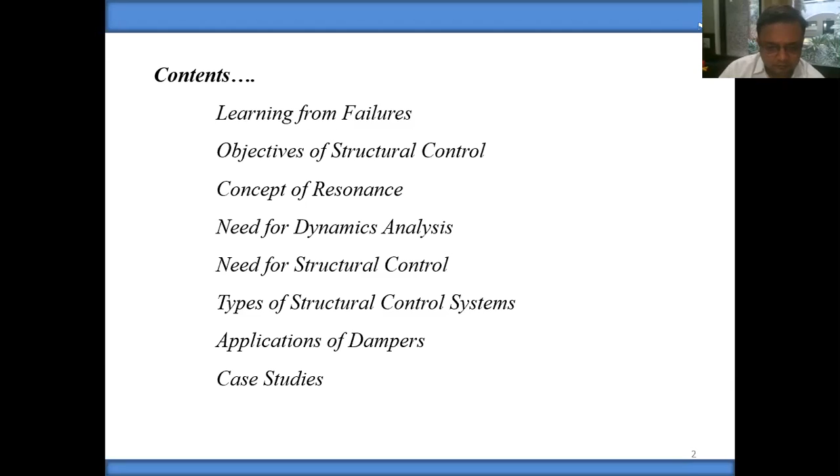So mainly we will include these few contents in context to our topic. First of all, we will see some photographs which I normally show to the audience just to get the feel of the content, and it creates basically the need for the study. Then we'll see the objectives of structural control, a little concept of resonance, need for dynamic analysis, need for structural control. Then we'll briefly see the types of structural control systems, and we'll see the application of dampers and a few case studies. So just a few slides I will show you.

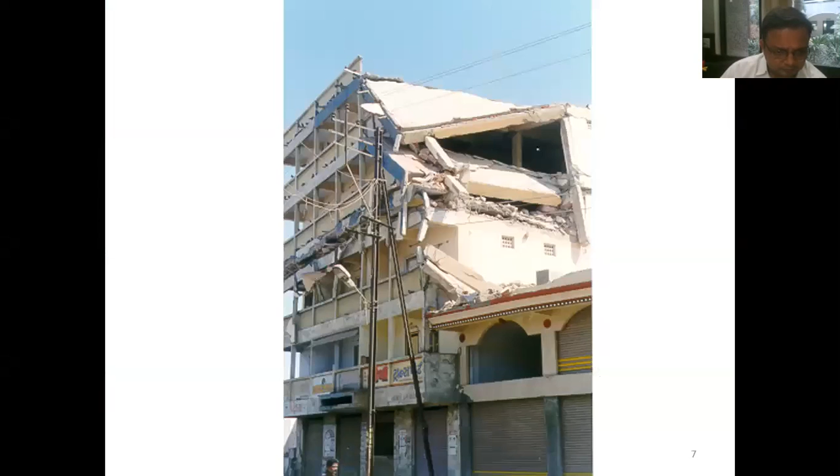Just the photographs from our unfortunate event of the 2001 Bhuj earthquake. So I'm scrolling through all the photographs, around 10 or 12. This will just give you the highlight - of course you must have seen all these photographs from many previous speakers or in your study also. This is just creating interest in the subject, in the sense that it emphasizes the importance of earthquake engineering in society.

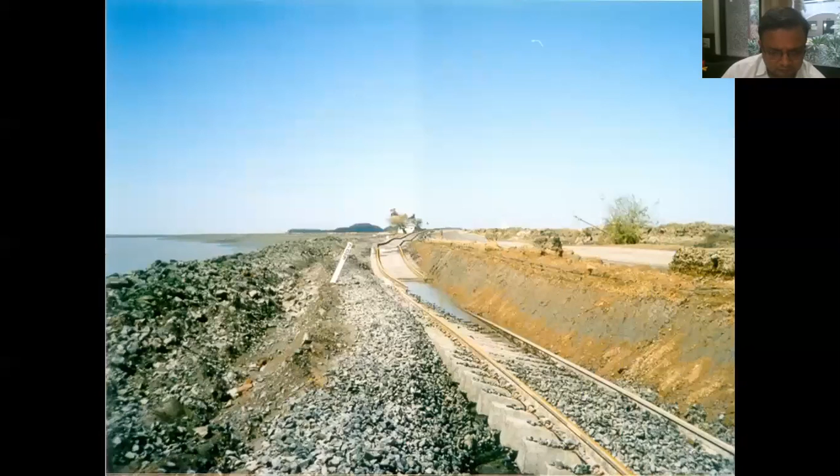That you just see the photographs - failure, collapse. So we can imagine what earthquake can do if the structures are not properly designed and constructed. See, people are spending their whole life to earn the money and to build one house, and what earthquake can do just in a few minutes.

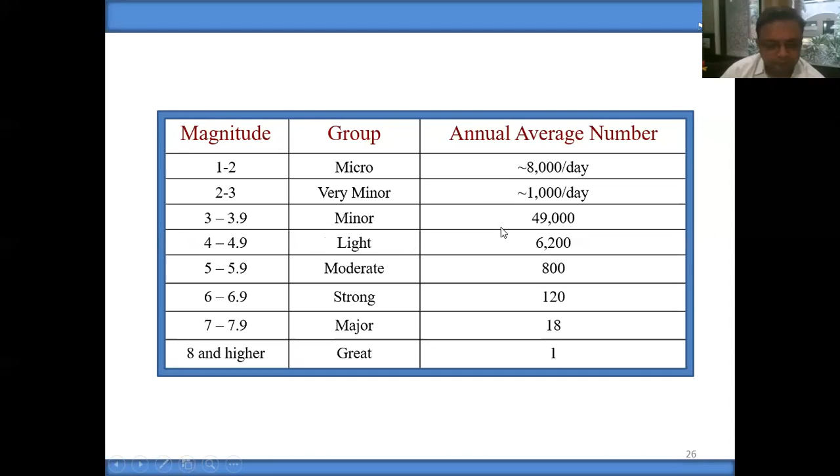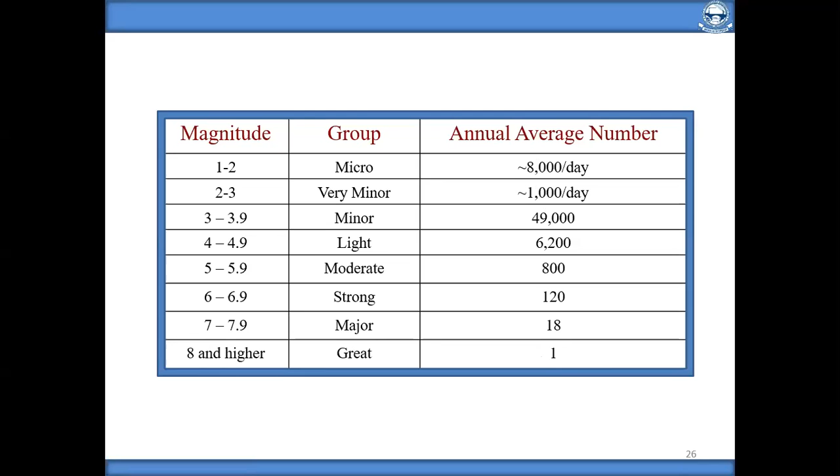If you consider a year, once in a year one earthquake comes which is of magnitude 8 or greater. So you can see a continuous 365 days disturbance due to earthquakes. And if we do not care about proper design, detailing, workmanship, material quality - everything, all planning, execution, configuration - if any of the components are missing, then it will lead to catastrophic disaster which we have seen in the earlier photographs.

Now two words are there - analysis and design, very basic words - which can be defined by means of these three parameters: force, system, and response. It means if we know the force, if we know the system, and we want to calculate the response, that procedure is called analysis. And on the other side, if we know the force, if we know the response - means let's say response means we want to have some zero deflection, if we consider a beam - so if we know the response, based on that force, to obtain that response, what should be the system design.

Now here, when we talk about earthquake engineering, this analysis word becomes seismic analysis, and design becomes seismic design. For the analysis, we mainly have IS 1893, which deals with earthquake forces and how to estimate the earthquake forces basically - so it covers the seismic analysis part. The seismic design, if we talk about it, is basically the ductile designing, as per IS 13920.

Seismic design philosophy must have been covered by the earlier speaker, but this is a very basic thing. As you're all attending this earthquake engineering STTP/FDP, you must have background in earthquake engineering, and you must have seen that as per IS 1893, we are not designing earthquake-proof structures, but mainly considering the earthquake resistant philosophy, that is the seismic design philosophy.

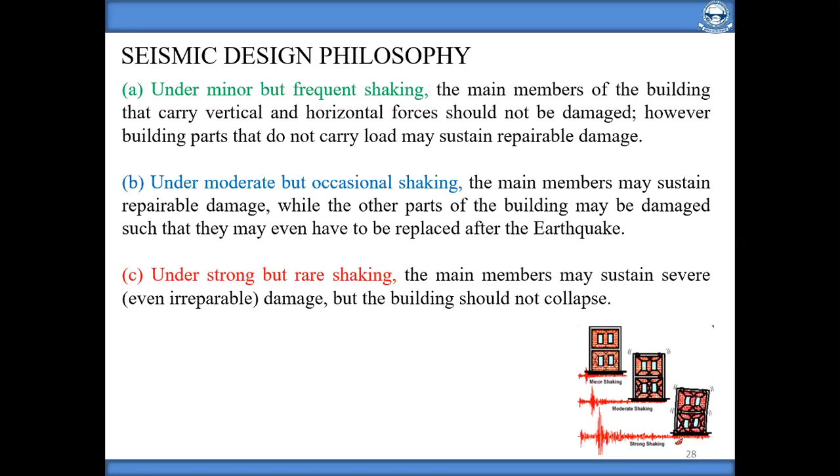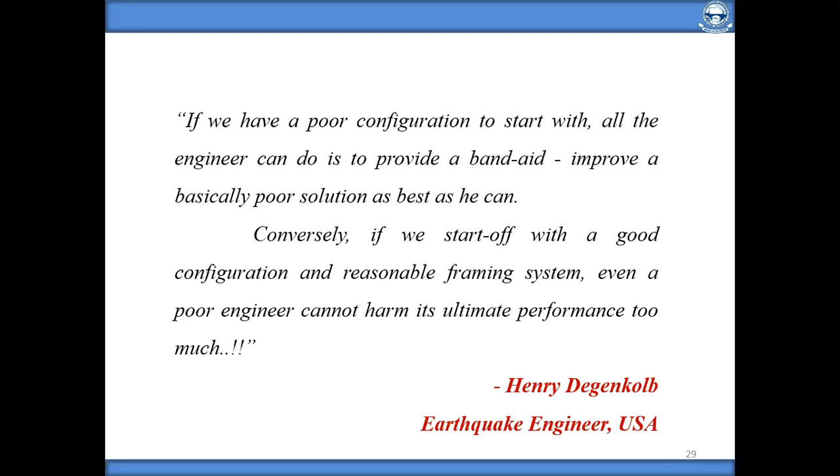Configuration is equally important as stiffness and ductility. There is a famous quote by Henry Degenkolb, a famous earthquake engineer of USA. He said, if we have a poor configuration to start with, all the engineer can do is provide a band-aid, improving the poor solution as best as he can. On the other side, if we start with a good configuration and a reasonable framing system, even a poor engineer cannot harm its ultimate performance too much. This emphasizes how much importance configuration has.

Again, the four points to consider: proper planning, proper structural design, good construction, and regular maintenance.

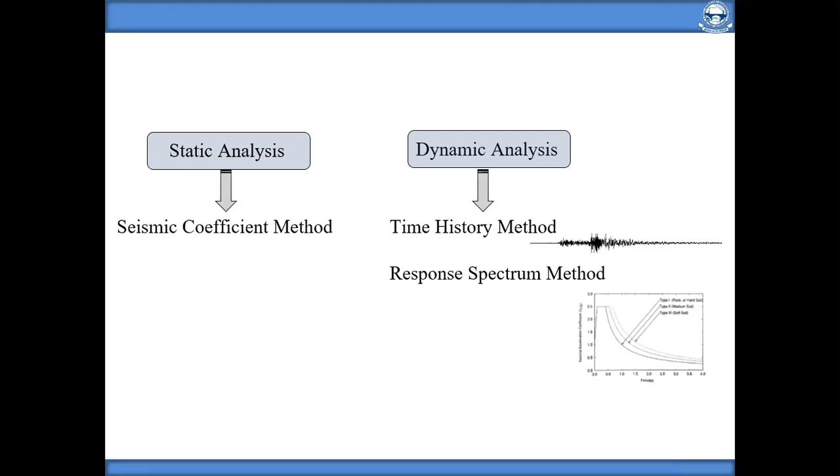Whenever dealing with the structural control system, the main analysis we have to do is dynamic analysis. What is the need for dynamic analysis? As per IS 1893 code, there are mainly two types of analysis: static analysis and dynamic analysis. In static analysis, that's the seismic coefficient method as per code. Dynamic analysis consists of two methods: time history method and response spectrum method. These are the broad analysis types; I haven't included details about linear and non-linear analysis since both categories have linear and non-linear analysis, but that's been covered by previous speakers.

Now, what is the need for dynamic analysis? Let's say we have a structure. We calculate the base shear as per the code equation VB, which you must be aware of, and we calculate the design horizontal seismic coefficient AH, which consists of mainly four parameters: Z, I, R, and SA by G. SA by G is based on the time period.

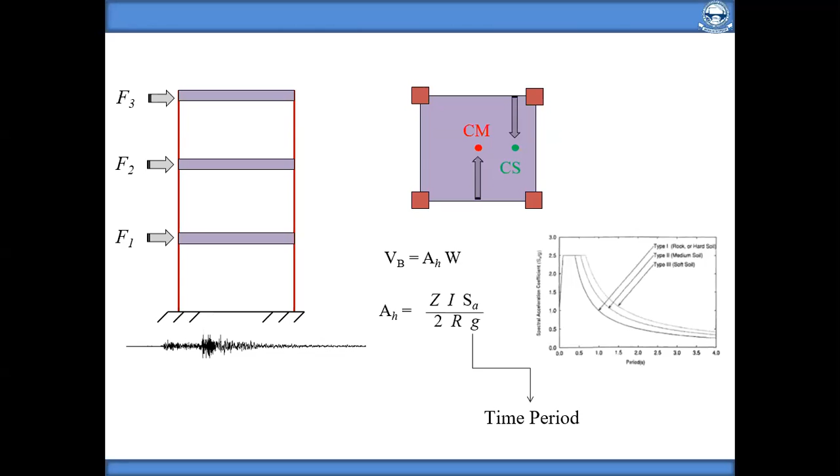If we consider the static analysis, here's a sample equation. Many equations exist for different types of buildings, with shear wall, without shear wall, etc. But to give you the basic idea, one conventional equation most commonly used is 0.09h by root d. Now, let's say we have this structure of G plus 2 story, with M1, M2, M3 as three masses and three stiffnesses.

This building elevation has two different cases. In case one, all columns are 300 by 300. In case two, all columns are 600 by 600. Height is same, plan dimension is same. So if the height and plan dimensions of the building are same, then the time period which we are calculating will be same for both buildings.

But if you imagine this as a model structure and we put these two buildings on a shake table, obviously there will be different behavior, because the stiffness is different, column sizes are different. But that behavior will not be captured by this time period, which is based on our empirical formula, that is the static seismic coefficient method.

Hence there is a need to perform dynamic analysis to actually capture the real behavior of the structure based on its stiffness and mass proportionality. And hence we go for dynamic analysis, calculating the time period using the conventional equation 2 pi by omega n, where omega n, the natural frequency, is based on square root of k upon m. This is just the basic equation, not our topic for today.

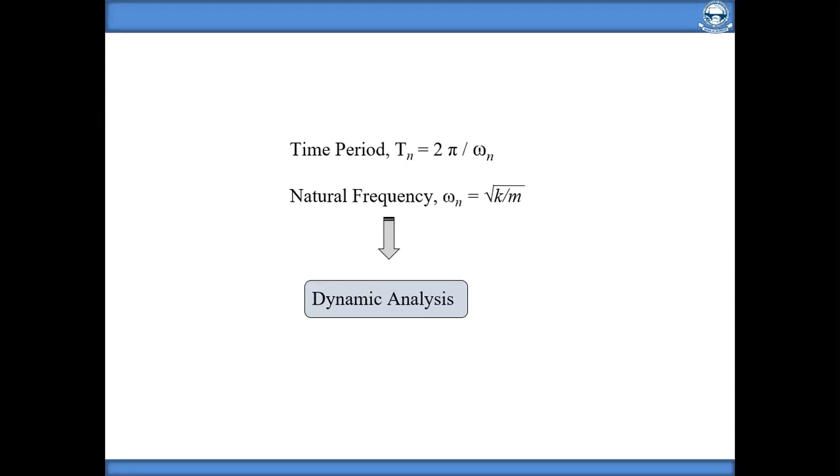I am emphasizing the need for dynamic time history analysis, which we need for structural control also. This is the equation to calculate the natural frequency, basically for the single degree of freedom system. If it is a multi degree of freedom system, then we have to perform modal analysis, eigen analysis, etc.

Now let us go to the seismic vibration control of this structure, that is called the structural control system.

The main objective of civil engineering, as we know, is mainly to design and construct safe and stable structures which can resist static as well as dynamic loading. Static meaning conventionally, gravity load, dead load, live load. Dynamic loading includes wind and earthquake, which are our conventional dynamic loadings.

Now, this objective of civil engineering structures can be achieved by the traditional approach which we are currently using, that is designing the structure with reference to strength as well as ductility aspect. But sometimes it may not guarantee the safety of the building against dynamic loading, which is very random, very irregular in nature, and highly uncertain.

Sometimes what happens, if we have a tall structure, let's say a 100-story building, and in comparison, imagine a 3-story building. To control the displacement of the 3-story building, what should be the column size? Randomly, let us say 450 by 450 mm. Typically our flats or apartments have 450 by 450 columns for a 3-story building.

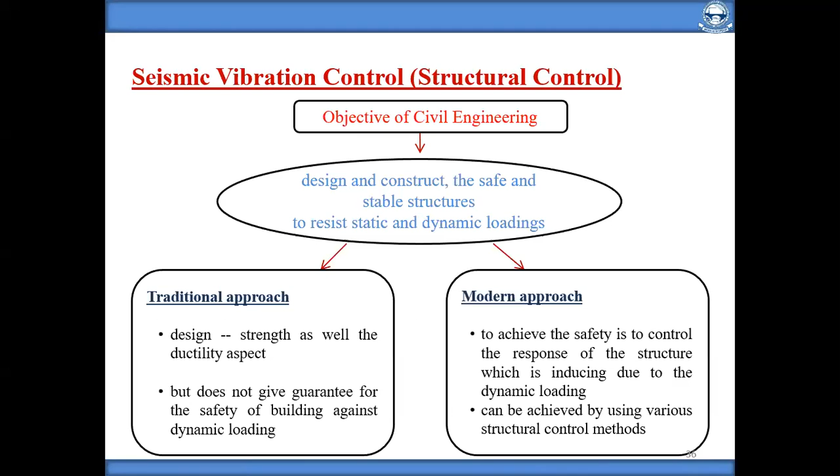Based on this particular need, there are a few objectives for the structural control system. The main objectives are to secure life safety, that is obviously number one, our main need, and to upgrade the comfortability for the user.

Let us go back to that previous example, the 100-story structure. During the wind, if there is a 1 centimeter displacement in the 100th story, what will be the comfort level of that user? It will not be functional actually. So comfortability of the users is equally important in comparison to maintaining the building function.

To maintain the building function, obviously during the earthquake, whenever there is some collapse, failure or damage, then the building should immediately be in a functional mode.

To secure the safety of non-structural elements, let us say we have some very important structures like a hospital or a nuclear power plant. For these type of structures, non-structural elements are equally important. Let's say if we have a 3-story hospital, and at the 3rd story there is an operation theater having some very costly equipment, or a nuclear power plant where pipelines are going on - making sure the safety of the non-structural component is also equally important. That is also the main objective of structural control, in addition to protecting the structural element.

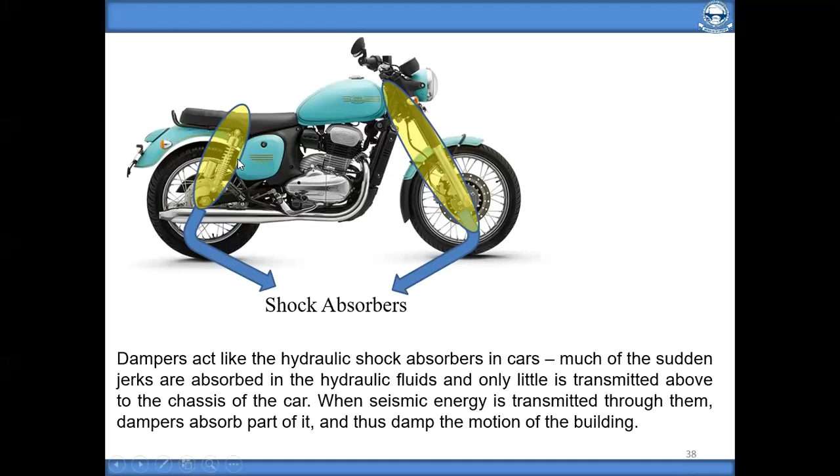So the dampers, the control which we are going to use, it is just like the shock absorber which we have in our vehicles. In a vehicle, in the front wheel there is a piston and cylinder, in the rear wheel there is a piston and cylinder surrounded by a spring. They are called shock absorbers in the automobile industry. In structural or civil engineering, we basically call it a damper - exactly the same mechanism, exactly the same configuration.

We are putting the damper - let us say this is the structure, and the damper we are putting like this, inclined. This is just a broad figure.

So the dampers are just like a shock absorber which we have in our vehicle, and it can absorb the jerk. Just imagine you are riding a bike without this shock absorber - if there is some unevenness in the road, immediately it will be affected at the seat level in terms of jerk. Just imagine the comfort level you would have without the shock absorber.

Now if you put the shock absorber and imagine riding this vehicle on some rough or uneven road, even those jerks will not be transferred to the seat level, because in between there are shock absorbers which absorb the particular energy. So the seismic energy is transmitted through the absorber, and dampers absorb part of it, thus damping the motion of the building. It reduces the vibration of the structure.

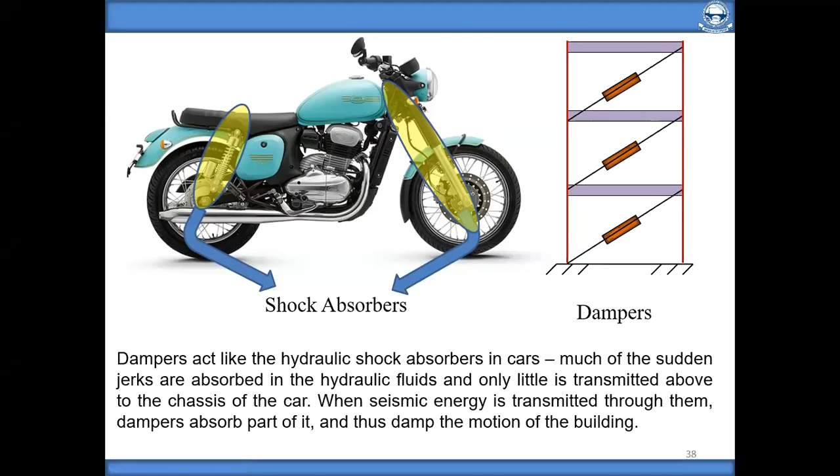Mainly three types of vibration can be controlled by any structural control system. Small vibrations we can control, obviously - micro tremor, traffic vibration, and vibration caused by machines. These can be easily controlled with the help of a structural control system.

Wind vibration, usual wind or strong wind, can also be controlled easily through the structural control system. And of course the seismic vibration, which is of main concern - that is small, medium, or strong earthquake shaking. Whenever shaking comes, the structure should not have severe displacement or severe acceleration, so we can control it.

Just 2-3 slides we'll see the application of the damper, some photographs of real structures, and then we'll go to the type of system, and then again we'll see in detail about this real application.

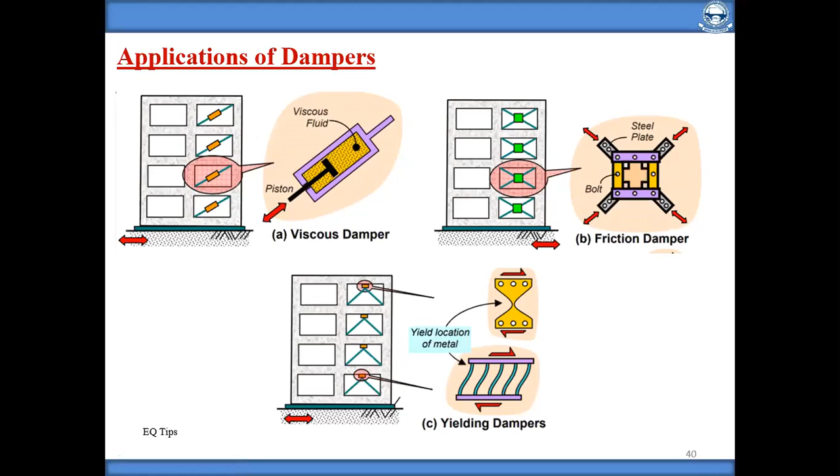These are the ways by which we can provide dampers in the structure to control any of the response - let's say displacement, velocity, acceleration. And ultimately by controlling displacement, velocity, acceleration, we can control the base shear, base torque, etc.

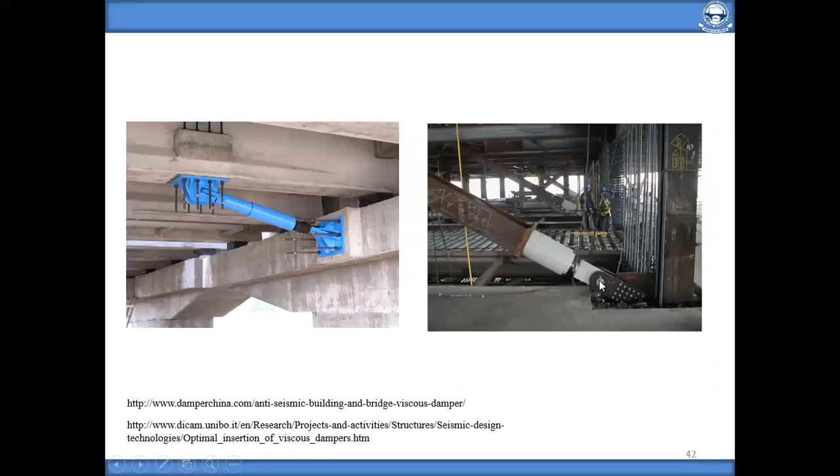Now the main fundamental principles of the structural control system.

The main principle is transferring the vibration energy from the main structure to the auxiliary system. Just imagine our vehicle example. What the shock absorbers will do is transfer the energy, absorbing it based on the jerk due to the unevenness or roughness of the road.

So to transfer the vibration energy from the main system to the auxiliary system, to reduce the flow of input excitation to the main system, between road and seat level there are shock absorbers. The shock absorber will absorb the energy.

To subject the structure to additional damping, whenever we are providing some structural control system like base isolation or primarily a damper, we are increasing the damping to prevent the building from exhibiting resonance.

You must have heard this from school level physics, that resonance is a very dangerous phenomenon. Whenever there is resonance, we have to control it. This can be very easily controlled by means of providing various structural control systems.

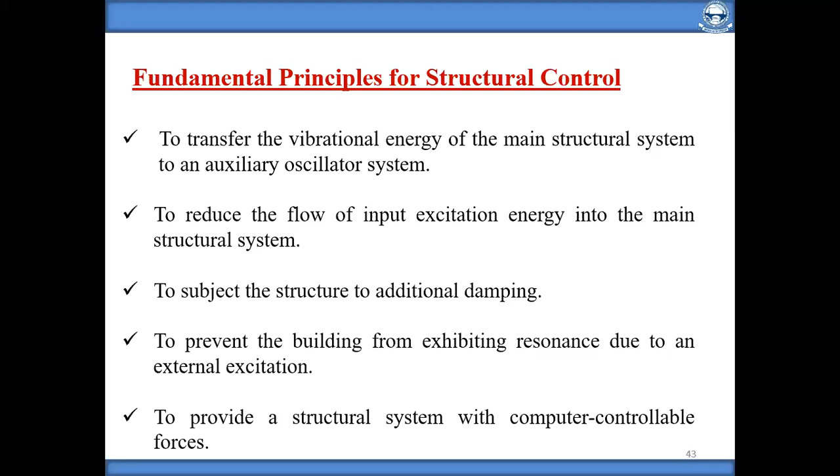And to provide a structural system with computer controllable forces - these are some fundamental principles and requirements for the structural control system. Now what is the required item for the structural control system itself?

Any structural control system should be a fail safe mechanism, meaning it should not do something wrong to the structure.

It needs to be back at the original position. Of course it is needed that the building should be back at the original position when the big wind or earthquake comes or ends. Hysteresis damping mechanism sometimes prevents the building from going back to the original position.

So we have to take care that the structure comes immediately back to the original position. The structural control system should be such that it brings the structure into its original position. It should obviously have good aging property for a number of years, and ideally it should have no or less maintenance.

So these are the required items for the structural control system.

Now, the resonance - you must have seen this equation of motion: mass into acceleration plus damping into velocity plus stiffness into displacement, and on the right hand side we have mass into ground acceleration. This is called the equation of motion.

We have the natural frequency, square root of k upon m, for a single story building, or a single degree of freedom system. If it is excited by the forcing frequency, and when that forcing frequency matches with the natural frequency, resonance occurs.

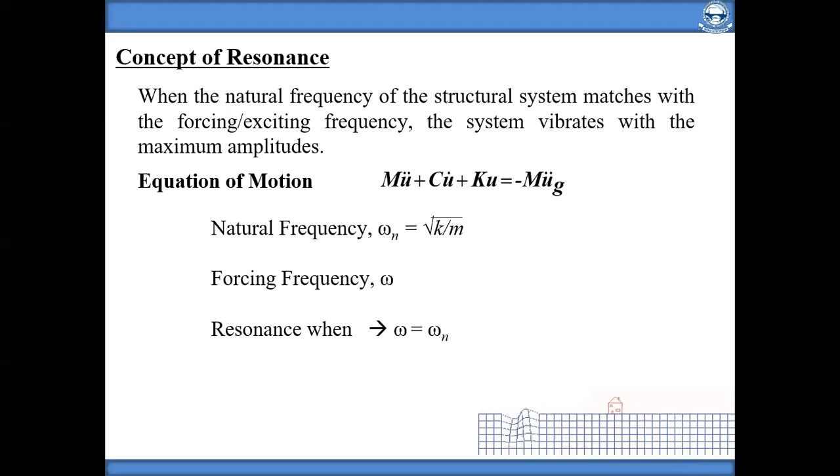So with the help of the structural control system we can avoid resonance also. If we have buildings with natural frequencies omega n1, n2, n3, n4, let's say we have 4 buildings, if the earthquake has frequency omega, then whichever building's frequency matches with this forcing frequency, that building will excite.

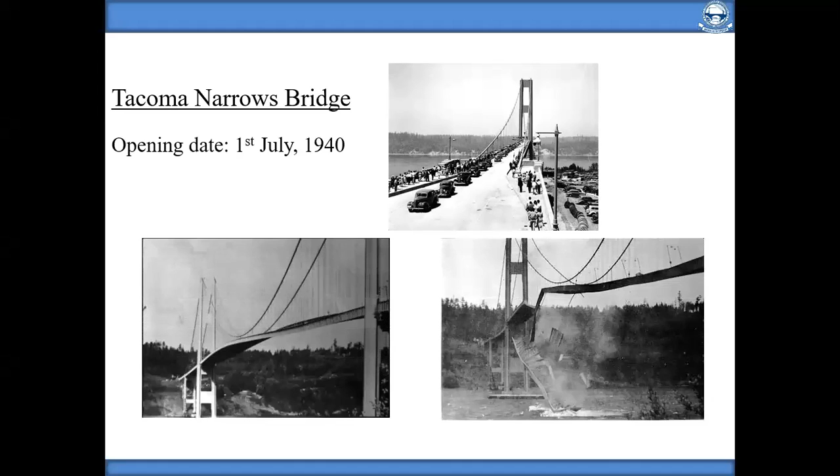There is one famous example of wind induced vibration, wind induced resonance - the Tacoma Narrows Bridge. 1st July 1940 was the opening date, and it collapsed on 7th November, just a few months later. That was because of the wind induced resonance.

This is the newly constructed bridge.

Similarly, one famous example of resonance is the Mexico City earthquake. On 19th September 1985, there was a main shock of magnitude 8.

In 1985, there was a main earthquake. On the next day, there was an aftershock. On the main shock, on 19th September, there was hardly any damage to any structure. But on the next day, even though the magnitude was less, being an aftershock, almost 1100 buildings suffered damage.

400 buildings collapsed and 700 buildings were heavily damaged. Later on they conducted a survey analysis and found that all these 1100 buildings were in the range of 6 to 14 stories, and they had a time period of 2.5 seconds, which matched with the forcing frequency.

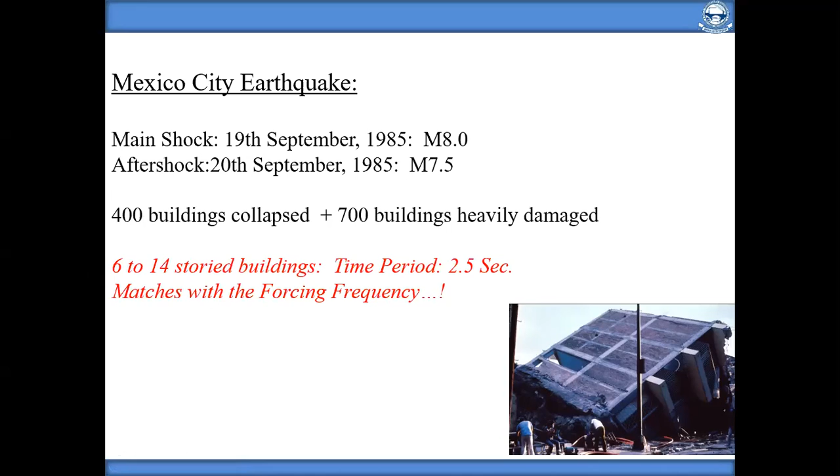So these are the cases of resonance. Now as we have seen, four types of control systems are there primarily: passive control system, active control system, hybrid control system, and semi-active control system, which is the most recent system used worldwide. So one by one we will see all the types of control systems including examples and applications, and then we'll go to the case studies.

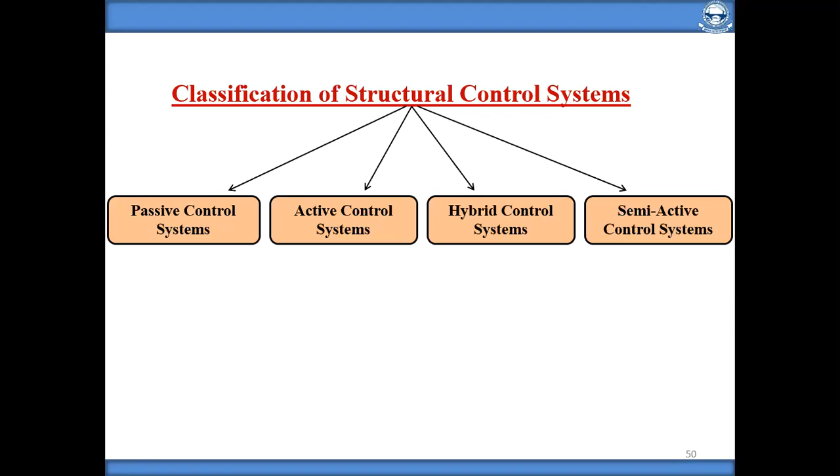As we have seen earlier, this is the equation of motion of the structure without any control mechanism, means without damper or without isolator, base isolation. So the equation of motion will be: mu double dot plus cu dot plus ku is equal to minus m into ug double dot. This equation of motion, if you solve based on the numerical method, that is called time history analysis. If we solve it, we'll get the displacement, velocity, and acceleration of the structure.

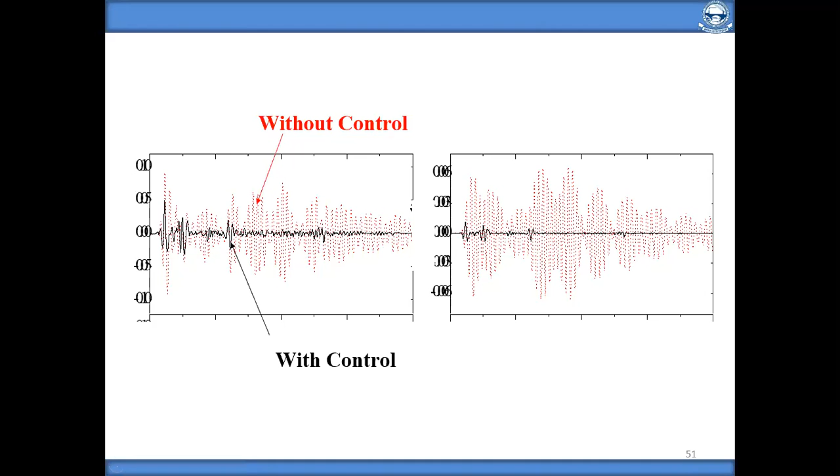See, the black line indicates the displacement, maximum displacement. Here drastically there is a reduction in the displacement or any parameter, right? This red dotted line indicates the structure response without damper or without isolator, and the black color indicates with isolator or with damper. So we can say there is a significant reduction.

If we have, let us say, 5% damping, which is the conventional damping as per our IS code also, IS 1893 — the damping which we have to consider is 5%, irrespective of the material, as included in the revised current version. In the earlier version, based on the material, different damping was there, like 5% for RCC, 2% for steel, but now somehow it has been merged to a single value.

But let us say we have this SA by G, spectral acceleration, versus the time period of the structure, which we are calculating either by dynamic analysis using the equation 2 pi by omega n, or using empirical formulas like 0.09 h by root d.

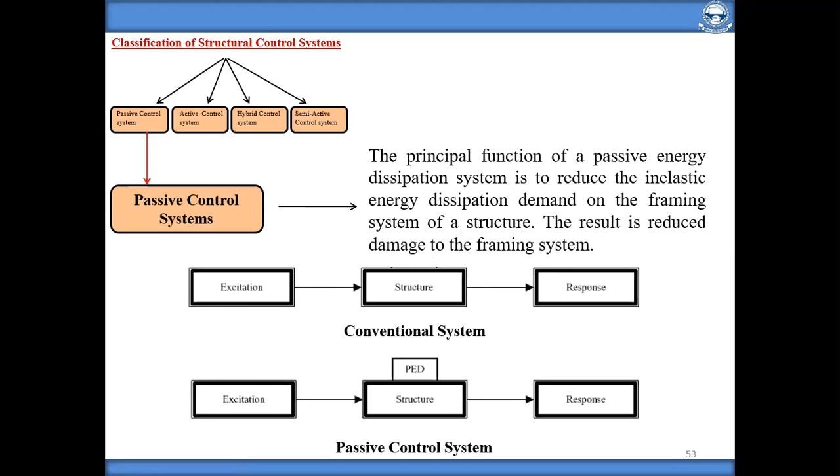Whenever there is excitation, in comparison to the conventional system, the excitation will be absorbed by the PED, passive device, and the response will be less. In a conventional system, let's say the displacement is 10 centimeters. Here, some of the energy will be absorbed, and instead of 10 centimeters it may be 5 centimeters, just broadly speaking. So it gives a less response - displacement and acceleration will generally be less, though of course it depends on the type of structure and damper.

So this is like the conventional system, a structure as it is, subjected to earthquake force, ground acceleration, and shaking. On the right hand side we have the building equipped with PED, passive energy dissipation device. A passive system means it will not change from time to time or in real time.

That's why it is known as passive. In the passive system, it doesn't require any power supply - that is the biggest advantage. It is usually relatively inexpensive and consumes no extra energy. The shock absorber in our vehicle - piston, cylinder, spring - doesn't require any external supply or battery backup. So it consumes no extra energy, no electricity.

It is very stable and works even during a major earthquake. These are the advantages of the passive control system.

The biggest disadvantage of the passive control system is that it doesn't make any real time changes to the system. Real time in the sense - recall our vehicle example equipped with piston, cylinder, shock absorber. If some minor unevenness is there in the road, it can be absorbed by the shock absorbers.

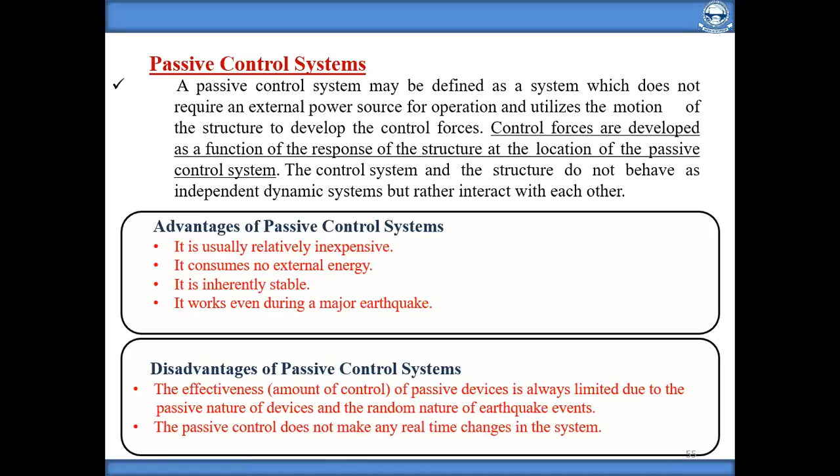These are a few types of passive control systems. Basically it consists of two categories: isolator and damper - base isolation system and energy dissipation system. In base isolation systems we have pure friction base isolation, LRB, FPS, and elastomeric bearing. You must have heard these from earlier speakers in detail.

Energy dissipation system we call a damper - they are also of the passive control category. We have different types of dampers: passive friction damper, passive viscoelastic damper, passive viscous damper, yielding metallic damper, tuned mass damper, tuned liquid damper. These are a few of the dampers.

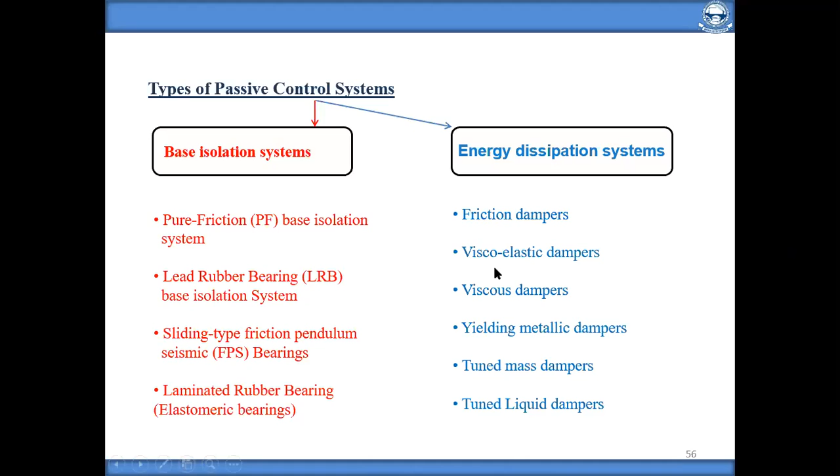The shock absorber in the front wheel of the vehicle is known as a viscous damper. The shock absorber on the rear wheel, having the piston cylinder surrounded by a spring, is called a viscoelastic damper in our terminology.

This was probably covered by the previous speaker on the first day - that base isolation, whenever we provide the isolator, it basically elongates the time period. The time period of the structure increases. So this is like our SA by G versus T graph which we've just seen, SA by G versus time period graph.

If a fixed base structure has a certain time period, when we provide the damper or isolator, the time period increases. Time period increases means SA by G reduces. Whenever SA by G reduces, the base shear and design lateral force will reduce.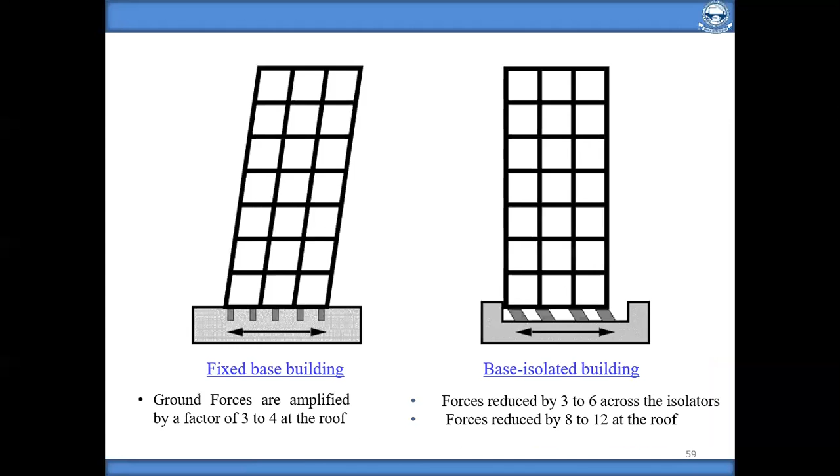This is showing the effect of the isolator. The left hand side building is without isolator, the right hand side is with isolator. In between substructure and superstructure, whenever we are putting the isolator, the energy will be absorbed.

A typical example is our Bhuj hospital. This is the first actual building of our country equipped this way. This hospital, you must be knowing, collapsed during the 2001 earthquake. It has a basement plus G+2 structure story. So this hospital building is equipped with the isolator.

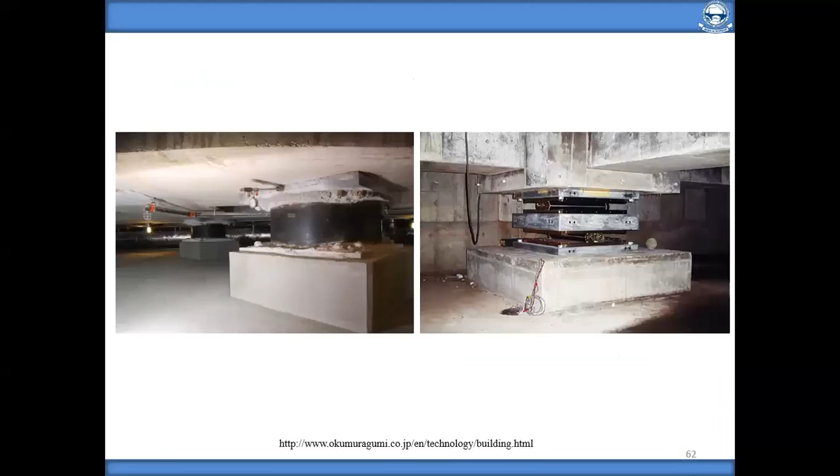I'll skip this part, it must have been covered. Bearing, lead rubber bearing, sliding bearing, elastomeric bearing - these are a few of the photographs showing the isolators which can be placed.

Now let us go to the active control system, the second category. Basically what happens - this is the structure. Earlier, with reference to our earlier block diagram, this is the excitation.

So excitation is measured by the sensor, through the accelerometer let us say. The structure is giving us the response, so that response is also measured by the sensor. The response of the structure and excitation of the ground both will go to the computer controller. That controller will give some command to the actuator, which will decide how much force is to be applied to the structure so that it can be controlled.

So two sub-mechanisms are there: one is the open loop, another is the closed loop - feed forward and feedback control.

So basically what is happening, let me give you the rough idea. If you have a structure, a single story building, which is getting displaced by 5 centimeters on the right hand side, then what should be done? We need to bring back that system into its equilibrium position. So there should be some pull force, just in a simple language. There should be some system, some actuator. That 5 centimeter displacement is a response here which is measured.

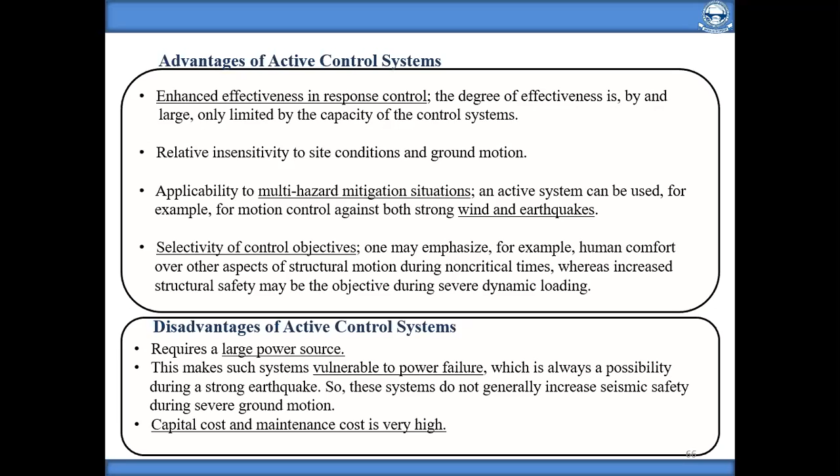And we need the full computer control system. But whenever the earthquake comes, there may be some failure or collapse or damage to the power station itself, the distribution system - electricity failure. So even if you have a very advanced active control system, during the earthquake there may not be electricity. Due to that, the whole system, even if properly managed and maintained, will not be of any use if there is no electricity, because it requires a very huge power source. That is the biggest disadvantage. It was developed and equipped in many mid-rise to tall high-rise structures worldwide, but it has this disadvantage.

These are a few types of active control systems: active mass damper, active tuned mass damper, active tuned liquid column damper, and active variable stiffness damper.

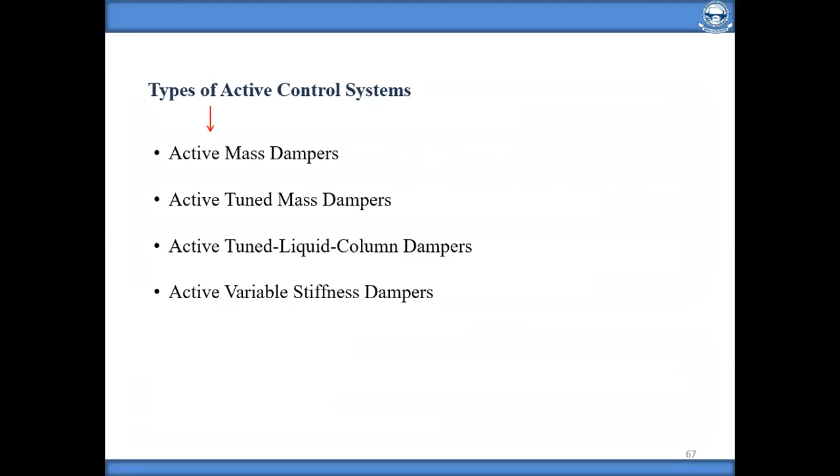We'll see just a few of the videos I downloaded through the internet, YouTube.

Hybrid control system is just a mixture of passive and active, as the name suggests. In passive we had this, in active we had this, in hybrid we have both. So whenever there is a failure of the power supply, the active will not work, but the passive component will still be of use, offering some degree of protection. But it is difficult to control the multiple devices, the design and implementation are quite complicated, and the cost will also be higher since we have to include both passive and active systems.

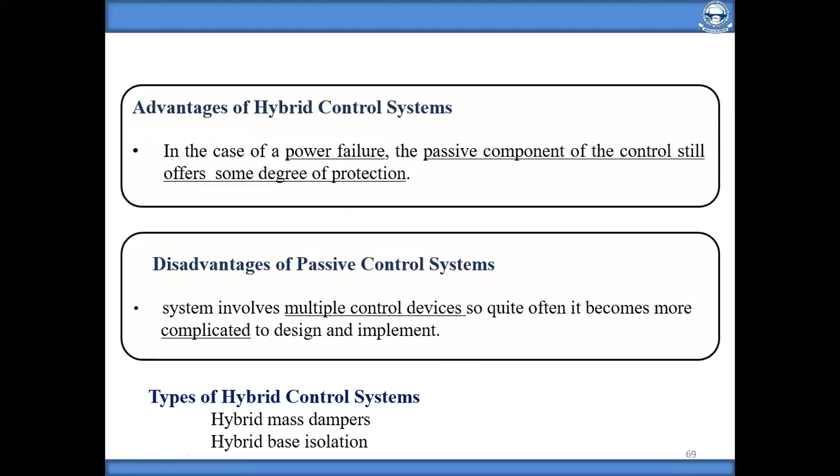Hybrid mass damper, hybrid base isolation means that in addition to the damper, isolators are also provided.

Nowadays, a very recent control system being used worldwide is the semi-active control system. Let's see the difference between the active control system flow chart and the semi-active control system. In the active control system, the actuator or computer controller was connected directly to the structure. Whereas here, the computer controller or actuator is not connected directly to the structure, it is connected to the passive device itself.

So what does this mean? The purpose of the computer controller or actuator is not to give any command or supply to the structure, but to make real-time changes in the passive device itself. Let me come to that point.

Let us say this is a passive damper. A passive damper is just like the shock absorber of the front wheel of a vehicle. This is the cylinder, then we have two chambers and this is the piston. So when you push the piston, the viscous fluid in chamber number 1 transfers to chamber number 2 through the orifice. That is a passive damper, the simplest mechanism of a shock absorber or passive damper.

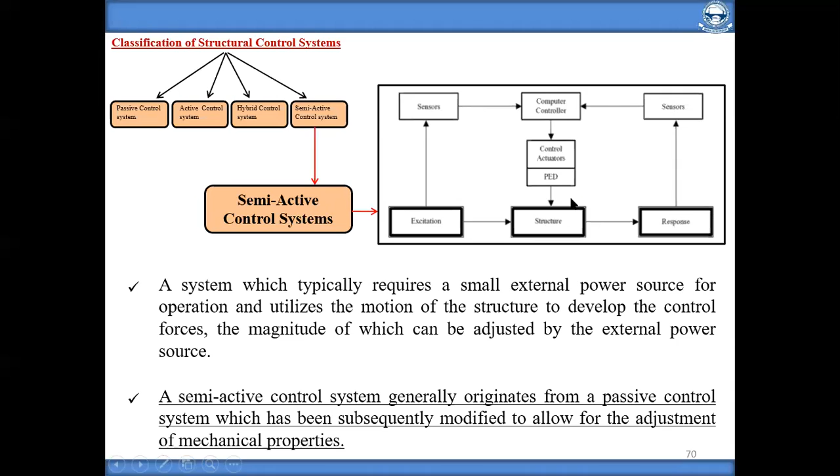So what does the controller or this system have to do? The response is measured by the sensor and sent to the computer controller. The computer controller has to decide what should be the position of the control valve based on the need. For example, if the displacement is 5 centimeters, what should be the force applied by the passive damper so that it can absorb the energy generated through that 5 centimeter displacement?

When you provide the additional valve, the computer has a number of control algorithms associated with different types of dampers. These mathematical control algorithms, the programming, based on the input and feedback received from the sensor, will decide what should be the position of the control valve. So where is the need for power supply here? The power supply is required just to control the valve only.

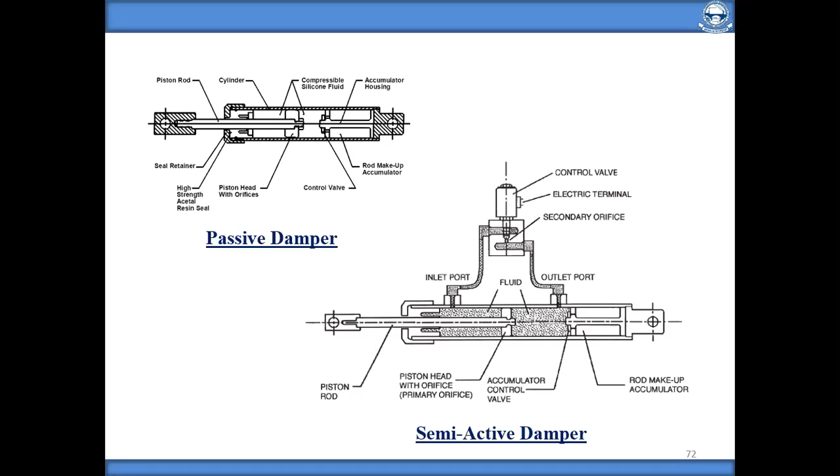It has nothing to do with the actuator, or the total force required to be applied to the structure. So even if there is a power supply failure during the earthquake, these semi-active dampers will work very well, because just to open or close the valve, or partially open or close it, we need to operate only the control valve. This control valve can be operated with the help of a small vehicle battery, so there is no need of external power supply. An inbuilt battery backup will control the whole structure. That is the semi-active damper.

So these are the dampers as I mentioned. This is the damper, and this is again some photographs. So just to highlight the advantages: it offers the reliability of the passive device and maintains the adaptability. Very large force can be generated with a small energy supply. Maintenance is also easy, and it is a highly reliable control system.

These are the few types, the varieties which we were having in the passive control system. The same varieties are available in semi-active dampers as well, and they are placed physically also: semi-active viscous damper, semi-active controllable fluid damper. In controllable fluid damper, two sub varieties are there: MR damper and ER damper, that is magnetorheological and electrorheological damper. Then semi-active friction damper, semi-active stiffness damper, semi-active tuned mass damper, and tuned liquid damper. These are the different types of dampers.

So we'll see one by one all these photographs and the functional mechanism of each damper. But before that, let us see some of the videos I have downloaded, just to give you an idea. I hope this video is visible.

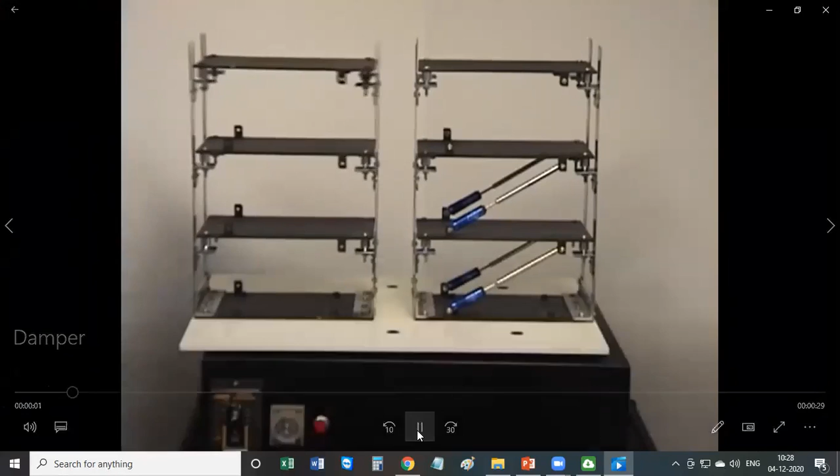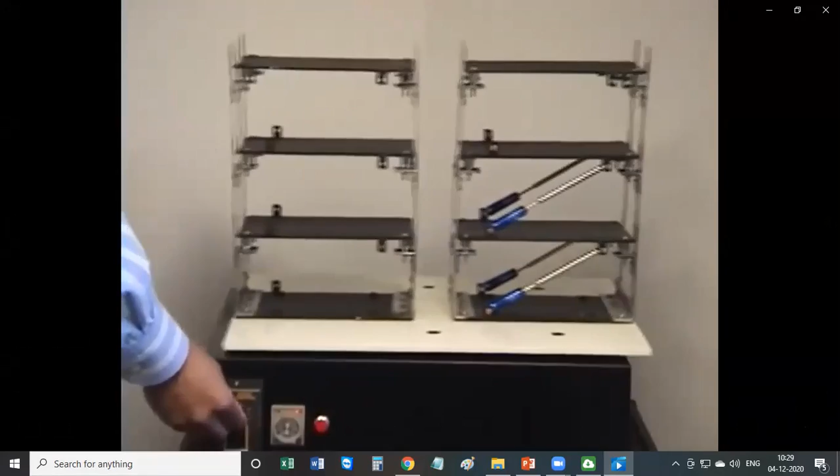See, this is the shake table on which two models are there, experimental models. The left hand side is without damper, the right hand side is equipped with the damper. So the dampers are placed like this. You can see the roof displacement or the interstory drift. See the roof displacement or the interstory drift. Immediately this building is getting controlled by means of the damper, whereas there is still some disturbance in this structure. That is the effect of damping.

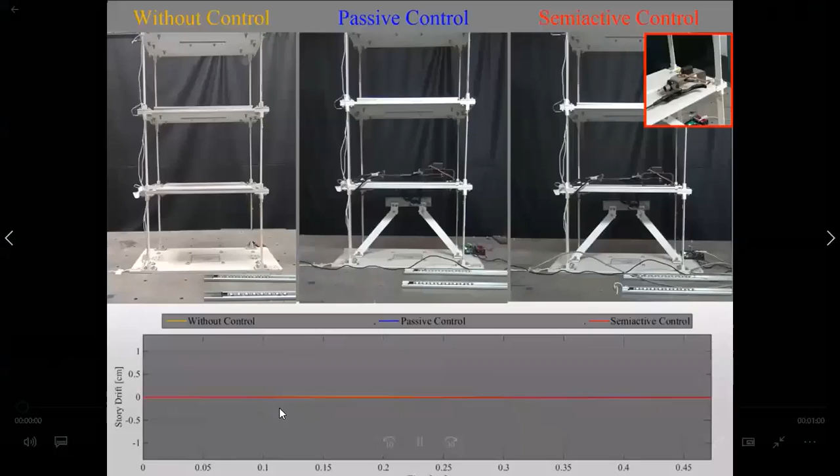Another example: as I mentioned, this is the experimental structure without control, meaning this building doesn't have any damper. This one has a passive control system, and this one has a semi-active control system. You can see parallel to this video, there is a graph created through the experimental setup. The yellow line is without control, the blue line is passive control, and the red one is semi-active. Just see parallel to the video.

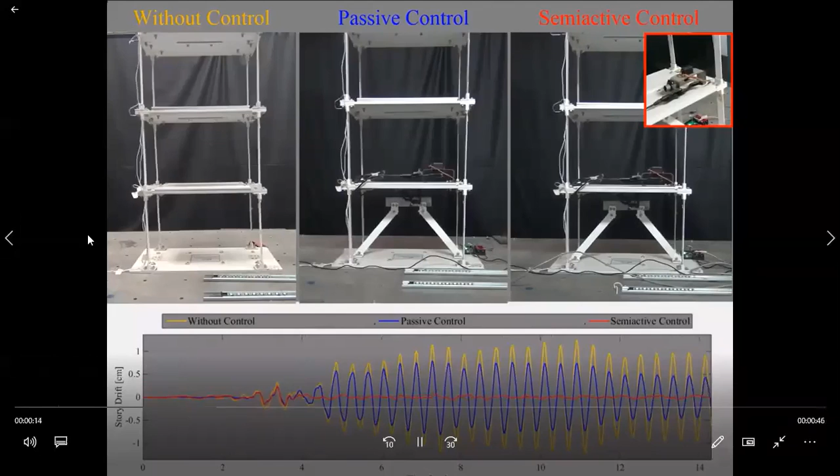See these three lines, this is the response measured by the sensor. Yellow means without control, without damper. Blue means if we provide the passive damper, then this will be the reduction, and if we provide semi-active, then a drastic or significant reduction will be there. It is showing the effectiveness. The structure without control is still vibrating, whereas the vibration in the passive and semi-active stopped, with much more significant effectiveness in the semi-active control system in comparison to the passive control system. Just see all these three patterns - very effective, this semi-active control system.

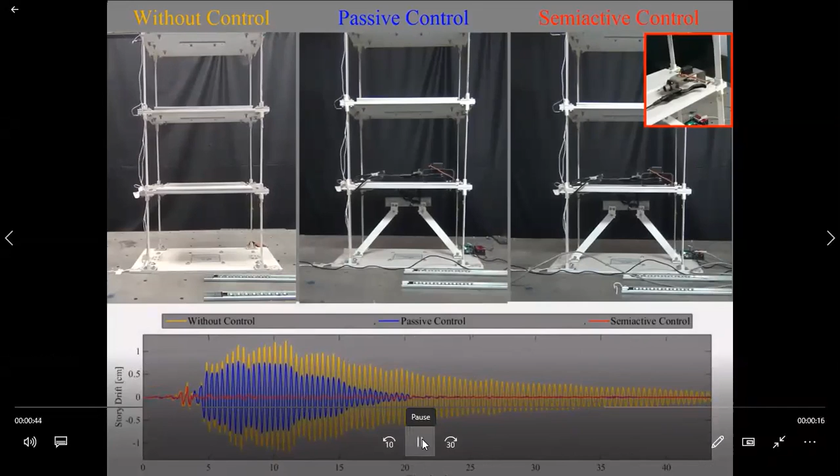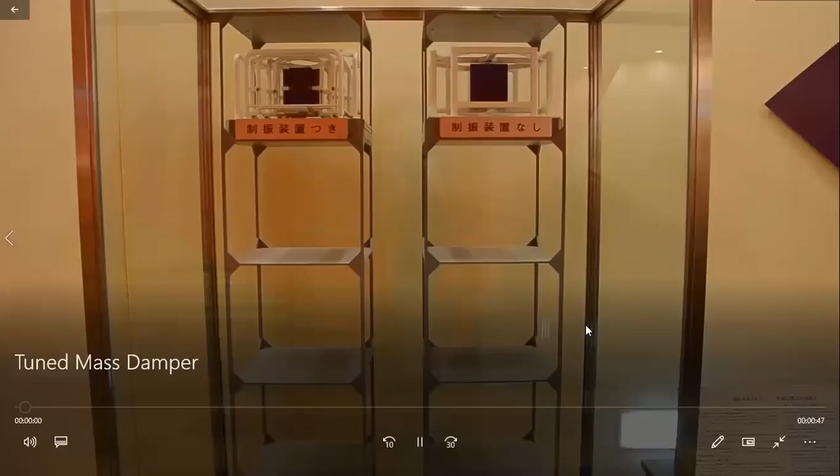So that is called as TLCD. Another we have, that is tuned mass damper. This tune mass damper means the mass is placed at the roof, again at the terrace level. Here the mass has been placed. This mass is tuned to the fundamental frequency, and hence the energy can be absorbed. See the difference. This building is vibrating, this is also vibrating, right? This is not tuned to the vibration.

This is tuned mass damper. Let us see one more time. See, this structure is vibrating, this is not vibrating. The energy is absorbed by this tune mass damper. See, it is immediately getting controlled, and the real tune mass damper has been placed.

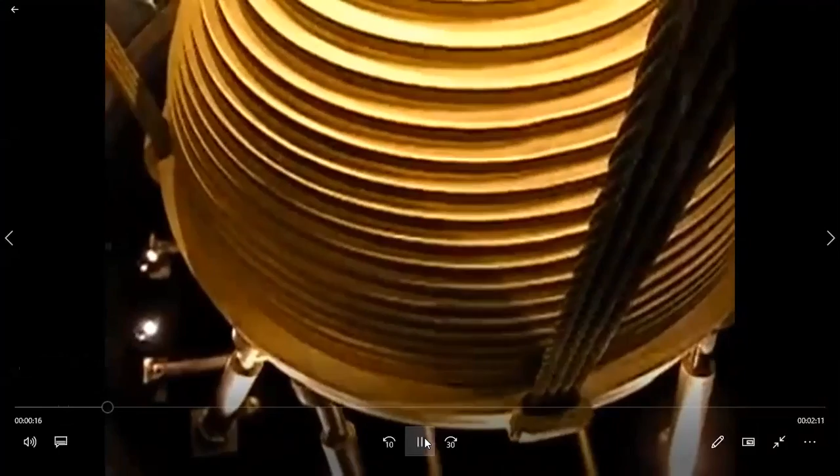One very famous example, you must have seen the video. It is a type of tuned mass damper, where a heavy ball, just like a pendulum, is placed. This is the pendulum, this is the whole heavy ball, which is tuned to the fundamental frequency, and with the help of that, see, it will vibrate like this. Whenever the building moves on the right hand side, this ball will move on the opposite side, and it will bring the system into the original position.

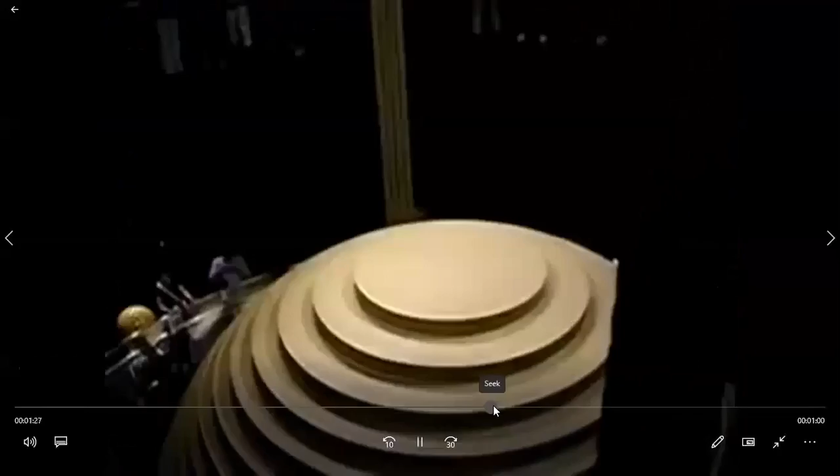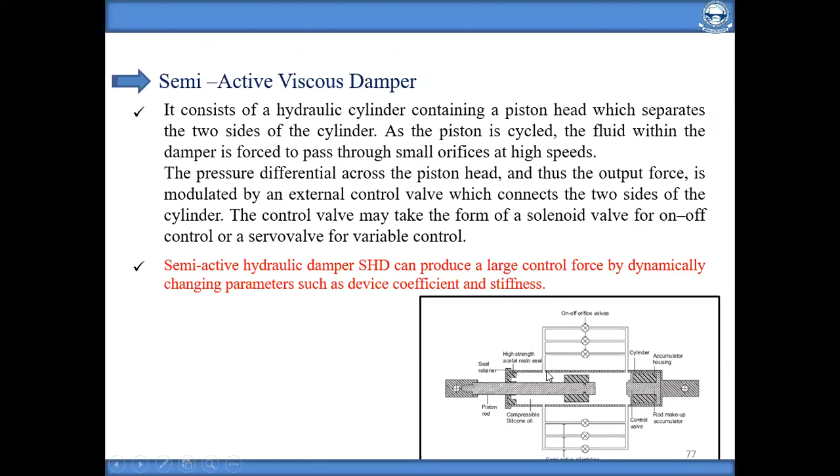So these are the ways by means of which the systems are provided with different kinds of dampers. Semi-active viscous dampers - just like now we have seen, there was one path. Instead of that, multiple paths can also be created based on the need, like this. So the fluid can pass parallel through multiple routes just to bring the required force.

As I mentioned, semi-active controllable fluid dampers have two categories: ER fluid, electrorheological fluid, and magnetorheological fluid. Magnetic flux is being generated, with the help of which the force can be generated. This is the actual image of a 20-ton MR damper, which is the most commonly used and most successful semi-active damper. It is a semi-active MR damper, magnetorheological fluid, made by the Lord company. This is the actual damper having a capacity of 20 tons.

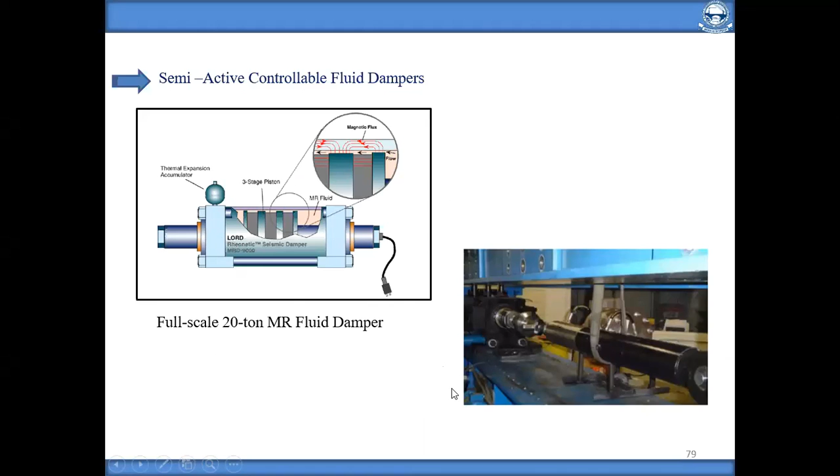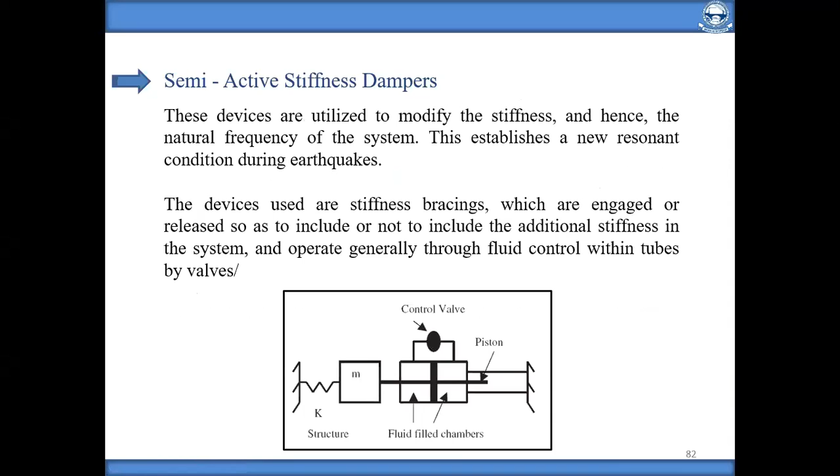Similarly, semi-active friction dampers are also there. Each and every damper which we have seen has its own algorithm and mathematical model. So we have to perform some numerical study, experimental study, and then it is to be fitted to the structures. Similarly, semi-active stiffness dampers are also there, which can provide some additional stiffness to the structure to control the displacement.

These are the same things which I have covered. Now let us see a few photographs just to give you an idea of how the dampers are fitted in real structures. So just I'm scrolling these photographs.

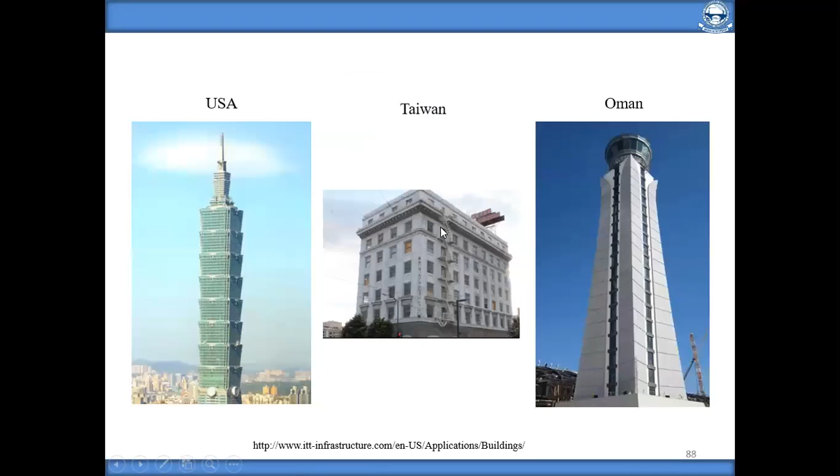These are the structures which are equipped with dampers. This was the structure just now which we have seen in the video, type tuned mass damper. This video we have seen this part - it is this building, this roof, this one. This is a tuned liquid column damper which we have seen at the terrace. There is a water tank with different partitions. The fluid will transfer from one chamber to another chamber, and the motion can be controlled.

These are the viscous dampers. See, this is the bracing, these are the dampers. This is also a metallic, or we can say, yielding damper.

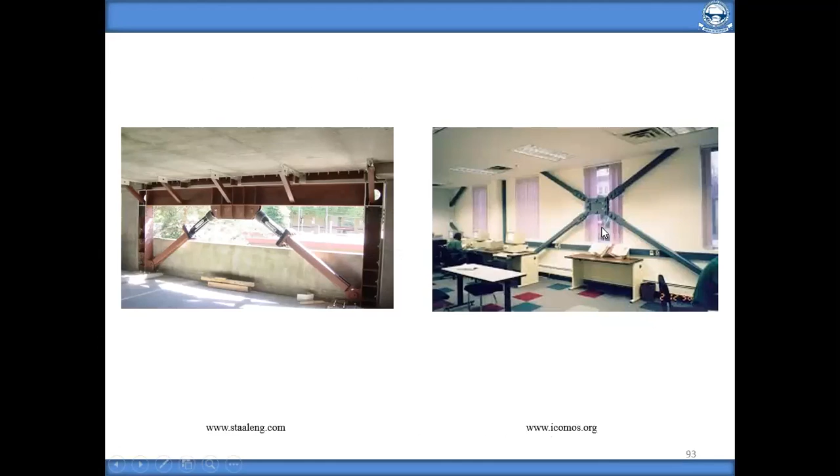This is again a real structure which is equipped with a semi-active hydraulic damper. This is the semi-active hydraulic damper. Number of dampers are placed. See here, in each and every story they have provided the damper like this, in terms of bracing. This is again a structure equipped with this type of damper, semi-active hydraulic damper, again made by the Kajima Corporation.

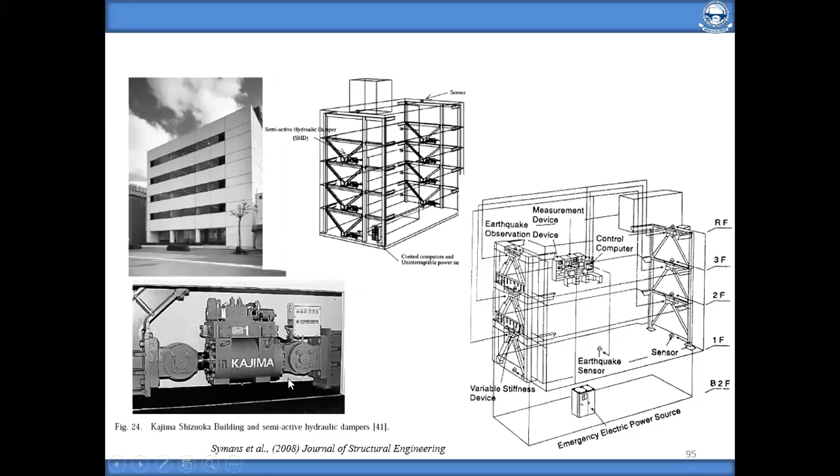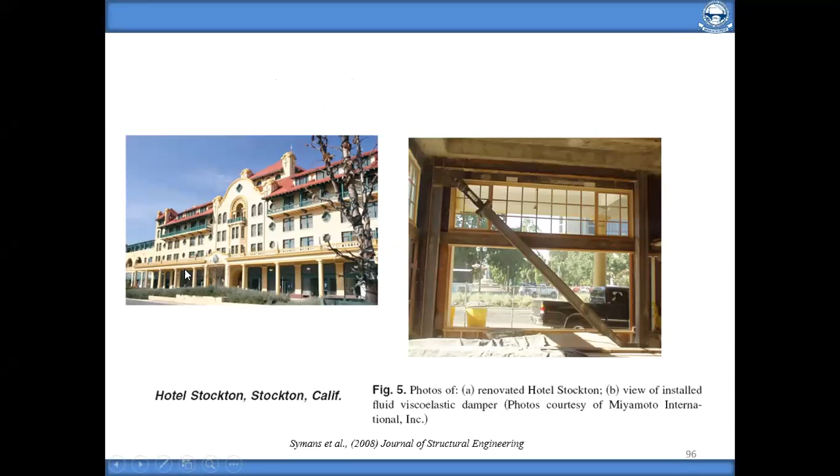This is some hotel building. It is also equipped with the damper. See, this is the bracing, and then this is the damper. So aesthetically we can cover it. It will not affect the architectural appearance of the structure. This is again the building - see, it has this damper.

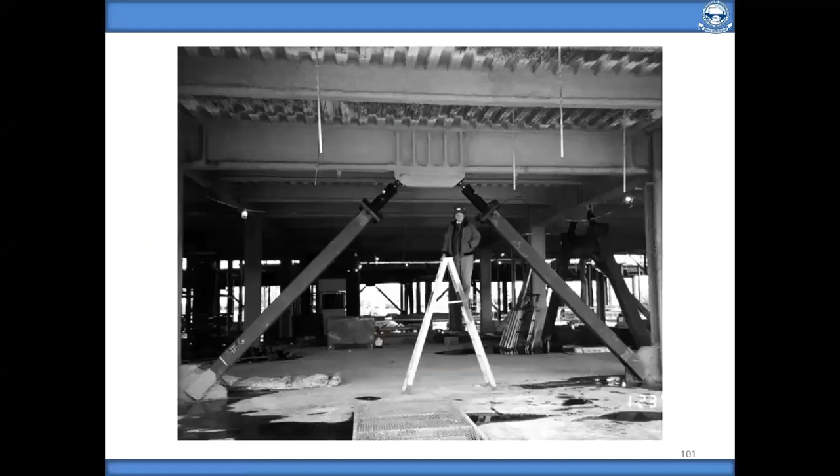These are the dampers, viscous dampers. This building has isolation as well as MR damper, both - a base isolated building with MR damper, hybrid mechanism. See here, these are the dampers.

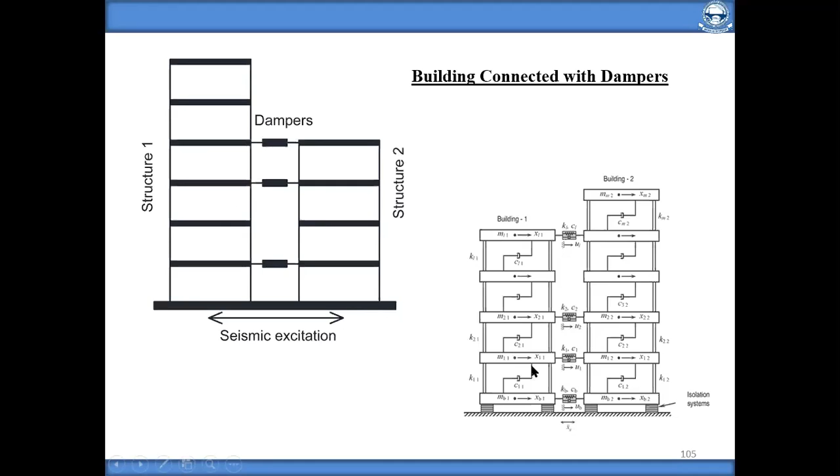So similarly, the photographs which we have seen were related to the single, or individual structure. Dampers can also be used to connect two buildings. If we have structure 1 and structure 2, this is also nowadays a very recent area of research. If we have two structures, they can be connected by means of a damper, so that whenever there is a seismic excitation, both responses can be simultaneously controlled by the damper. This right hand side figure is the mathematical model showing mass, stiffness, damping - all the parameters.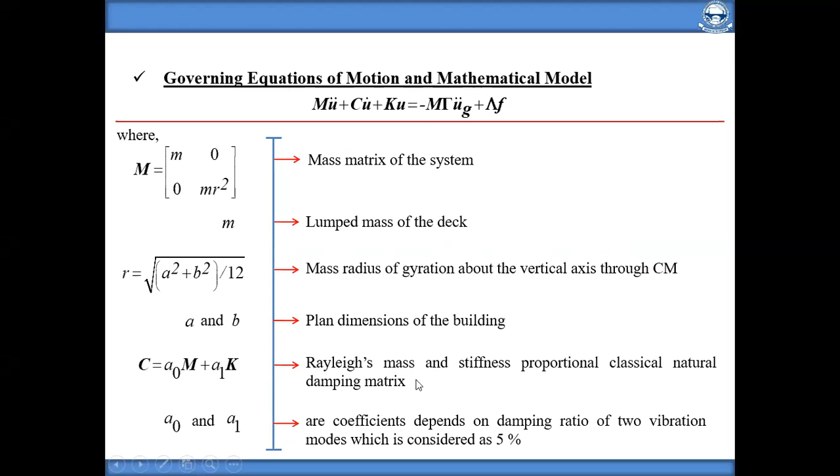C, the damping matrix which we have considered, is the Rayleigh damping, which is mass and stiffness proportional, A0m plus A1k, where A0 and A1 we have to calculate.

We have the stiffness matrix. Basically it should include the eccentricity effect. Then we have one more important parameter, that is the frequency ratio, which is the ratio of torsional to the lateral frequency.

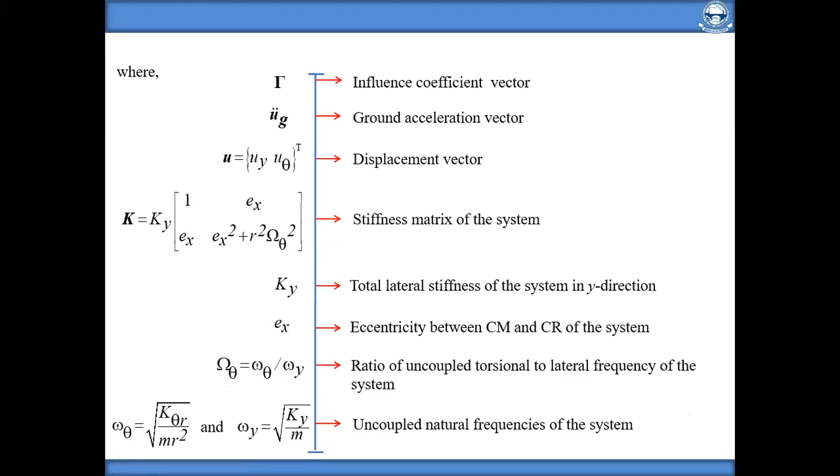Then we have used many methods. Those working in this area must be knowing many methods are there for the solution of the governing equation of motion. We can call it the time history method, which includes the Newmark beta method, fourth order RK method. Just like that, one of the methods is the state space method. This is the formulation for the state space method, which gives the solution of this particular equation of motion.

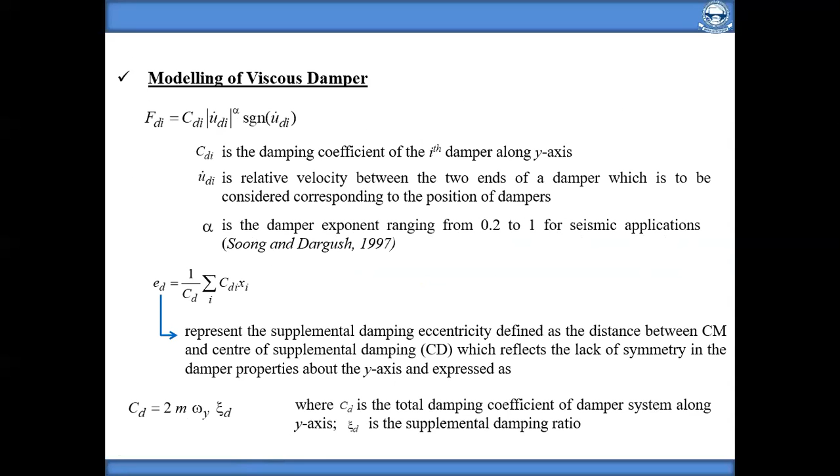This is the equation of the damper fd. So fd is cd, the damping coefficient, into the relative velocity to the power alpha. Alpha means it is a damper exponent. It may range from 0.2 to 1 for seismic application with reference to the Soong book. If alpha is 1, that means it is a linear damper. If alpha is other than 1, then it is known as the non-linear damper.

Now based on that, just a few charts, figures, and graphs I have included. RE, let's say RE for the left hand side figure, RE for U theta is torsional displacement, and these are the lateral displacements. Lateral displacement on the stiff side, u_ys, and lateral displacement on the flexible side. On all the graphs, the vertical axis is RE, and the horizontal axis is alpha, ranging from 0.1 to 1.

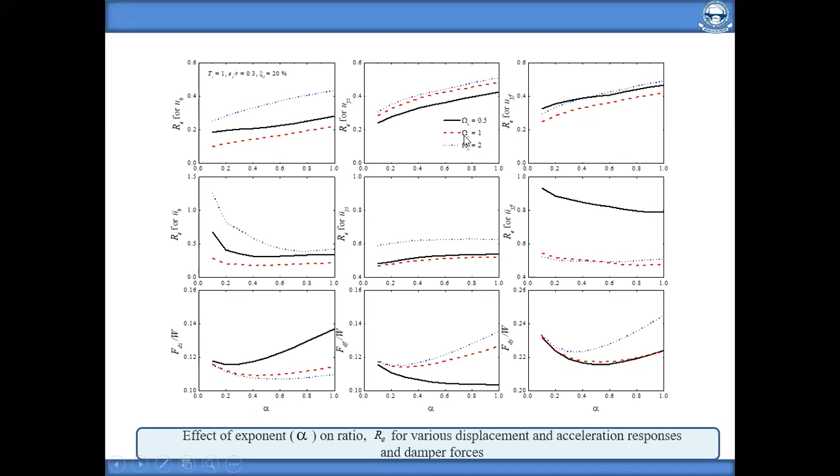So irrespective of any value of alpha, all the graphs show values less than 1. That means for all values of alpha, RE is less than 1 for the structure having a time period of 1 second, this eccentricity, and 20% damping. That means the dampers are quite effective in reducing the responses. This is the effect of damping. These three lines indicate different frequency ratios, torsional to lateral frequency: 0.5, 1, and 2.

This red dotted line indicates the uncontrolled response, meaning the structure without any damper. This black line is the linear damper, and the blue is the non-linear damper. Alpha is 1 in the black line, alpha is 0.35 in the blue. You can see that whether it is a linear damper or non-linear damper, it is effective compared to the uncontrolled system, shown with the red dotted line.

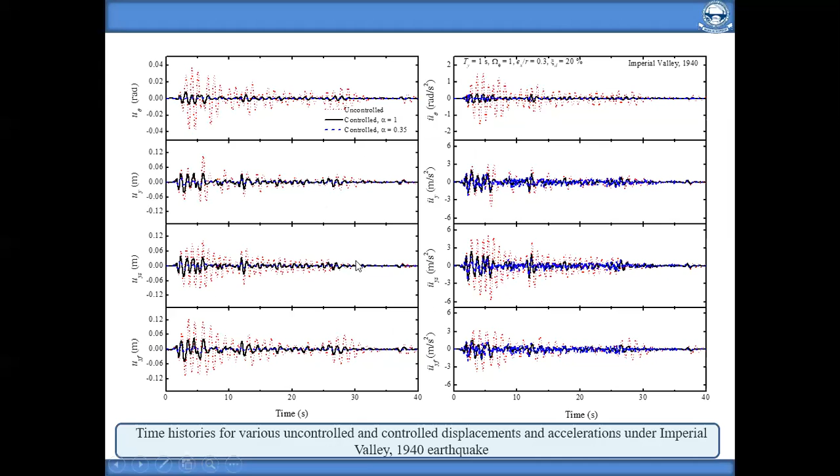This is the typical characteristic of force-displacement and force-velocity for the viscous damper. F, as I'm sure you know, if the damper is viscous, is directly proportional to velocity, right? So this is the idealized linear damper. For this study, for this particular building, if we plot force versus displacement, we call it a hysteresis loop.

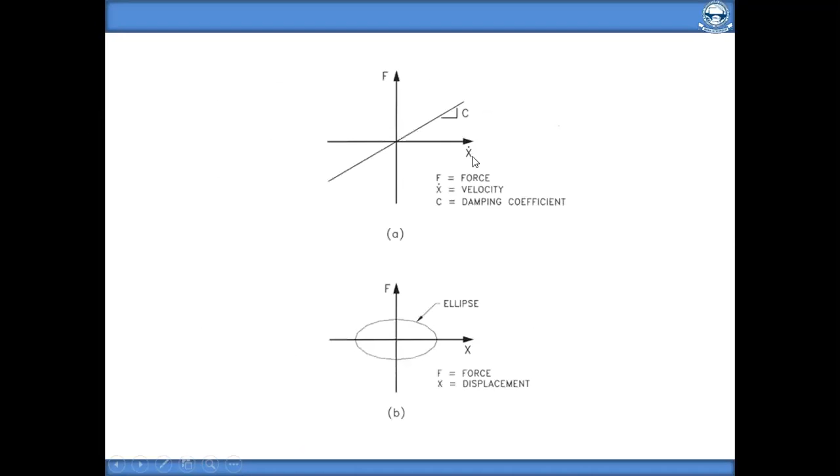So hysteresis loops are these: between force and displacement, and force and velocity. If we plot force versus velocity, it will be an incline, meaning a straight line, which means it is the idealized linear damper. What is the meaning of this hysteresis loop? If the loop has a higher area, that means higher energy dissipation capacity.

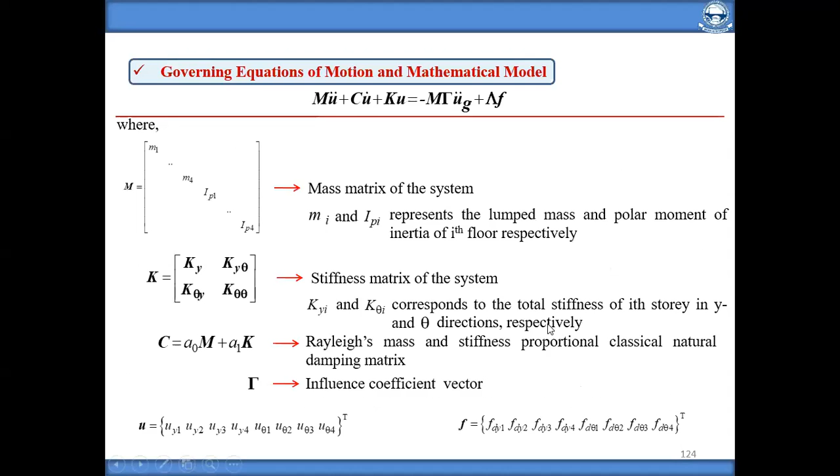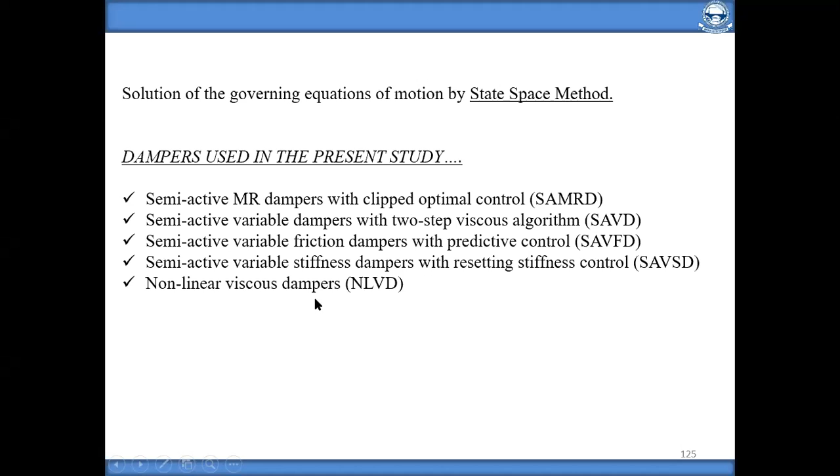Now just quickly, in 2 minutes, I'll show you another case study. It's a 4-story building which we considered for research purposes. This structure has asymmetry from here, right? Mass and stiffness are the same, column size etc., but due to the setback there is some asymmetry, and that has been addressed by this research. We used a number of dampers: semi-active MR damper, semi-active viscous damper, semi-active friction, semi-active variable stiffness, and the non-linear damper.

This graph will give you the story displacement versus displacement, for a 4-story building. You can see the black line, that's uncontrolled without a damper, showing the displacement. If you put any type of damper, whether MR damper, variable damper, friction damper, stiffness damper, or non-linear viscous damper, all are quite effective in reducing the displacement. Let's say the displacement is 8 centimeters here, and it becomes roughly 2.5 centimeters with the help of the damper, like that.

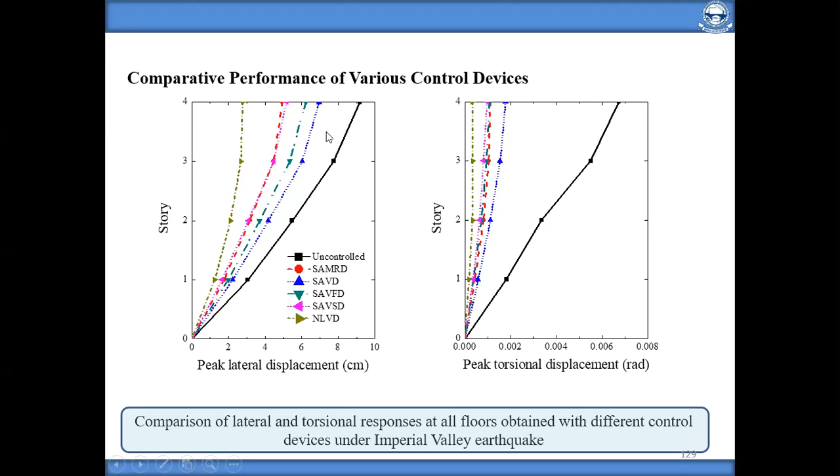So all dampers are quite effective in reducing the torsional displacement or lateral displacement, torsional acceleration or lateral acceleration, and ultimately the base shear and base torque. So this is just to give you the idea. I have intentionally not included too much formulation or mathematics, just briefly shown you the result.

So just one last slide, at the end I will show you one very interesting chart which we have to keep in mind, which I normally share whenever I talk with any group. From 0 to 1 minute, let us say at this moment if an earthquake comes, what is the positive thing? Nothing positive, but what is negative? There is panic, right? Immediately if the earthquake comes at this point of time, from 1 minute to 1 week, the events are aftershocks.

Obviously there will be fear, that is the negative part. The positive good thing is that within a week, from the next minute, there will be some rescue and survival. That is a good sign.

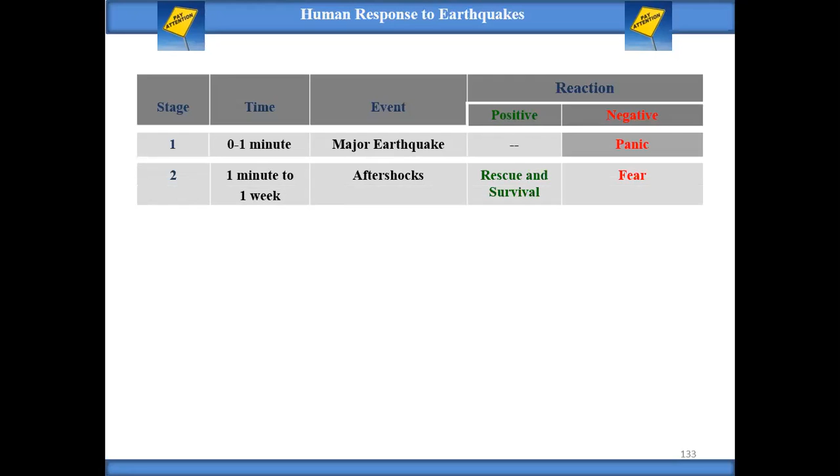From 1 week to 1 month, there is diminishing interest because aftershocks have been over, so people will start repairing, meaning short term repairs will be there. But the negative side is that, which is our typical human tendency, this allocation of blame business to the builder, official, designer, etc.

From 10 years to the next time, there is reluctance to meet the cost of seismic provisions, right? No need to design as per IS 1893, no need to consider 13920, right? Diminishing interest and reluctance. And the next time a major earthquake comes, the whole stage repeats from 1 to 7.

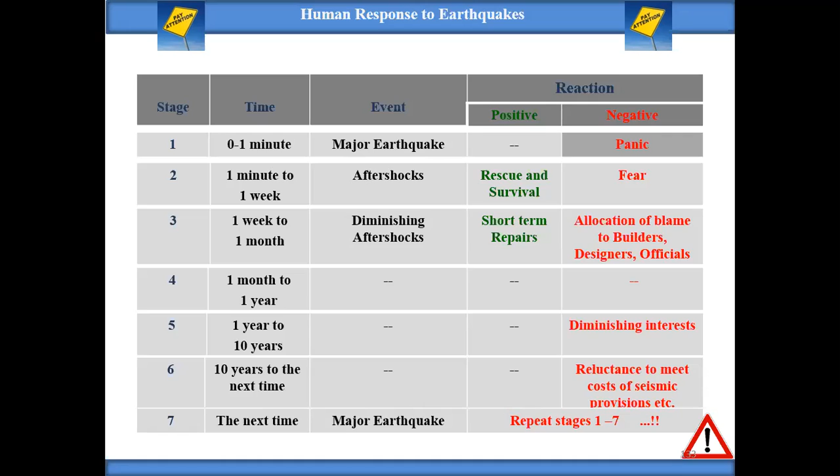So this is a sad but true fact, and we as responsible citizens of the state and country have to break this particular chain, right? We should design the structure for earthquake resistance.